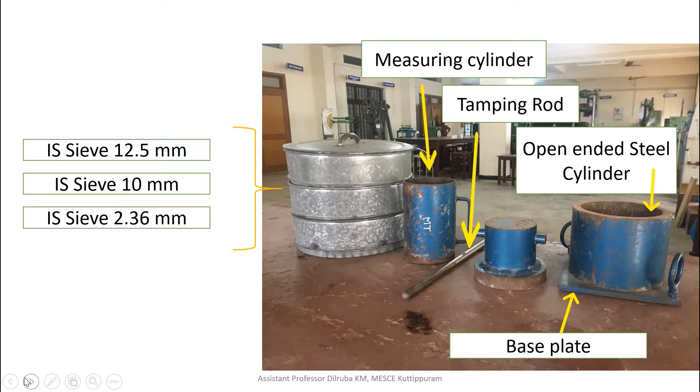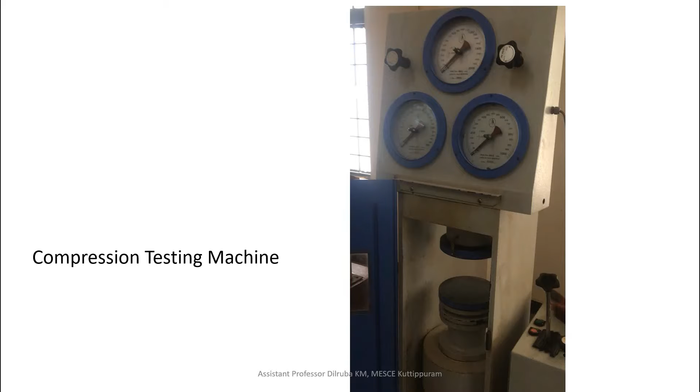First, let us see what are the apparatus required for this test. The first apparatus is IS sieve. We must need 12.5 mm, 10 mm and 2.36 mm IS sieves, a measuring cylinder, a tamping rod, and an open-ended steel cylinder with a base plate. Then we may require a weighing balance for taking the weight of the aggregates, and a compression testing machine in order to crush the aggregate.

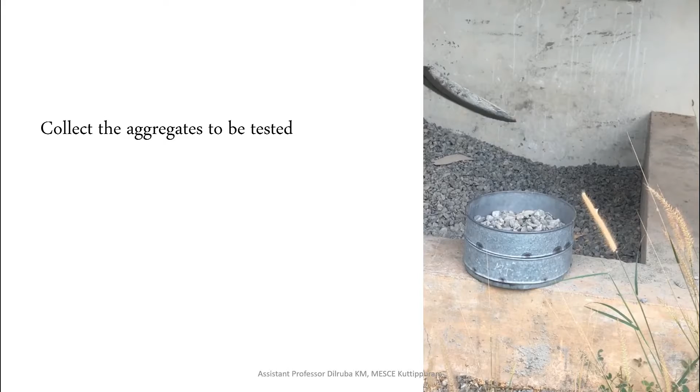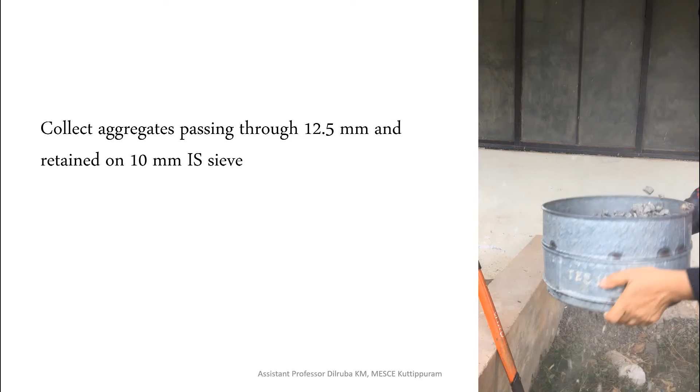First step is to collect the aggregate to be tested. We will collect some aggregate and sieve these aggregates through 12.5 mm, and we have to collect the aggregate which is retained in the 10 mm IS sieve. The amount of aggregate collected should be enough to fill the measuring cylinder, which has a diameter of 11.5 centimeters and a height of 18 centimeters.

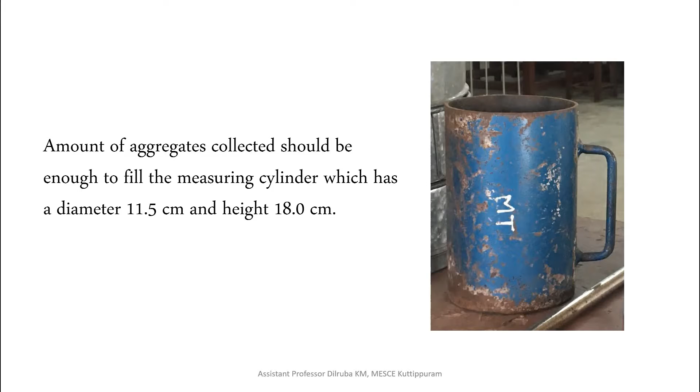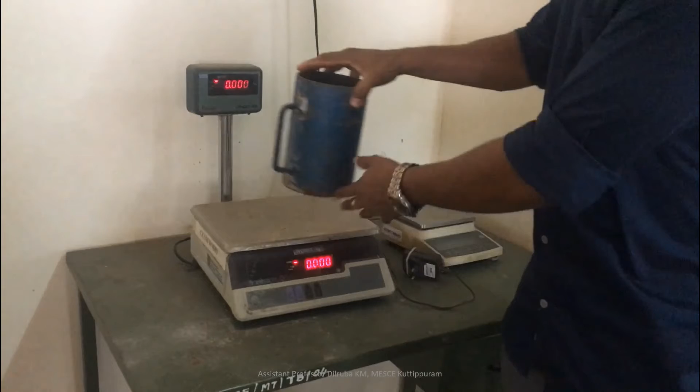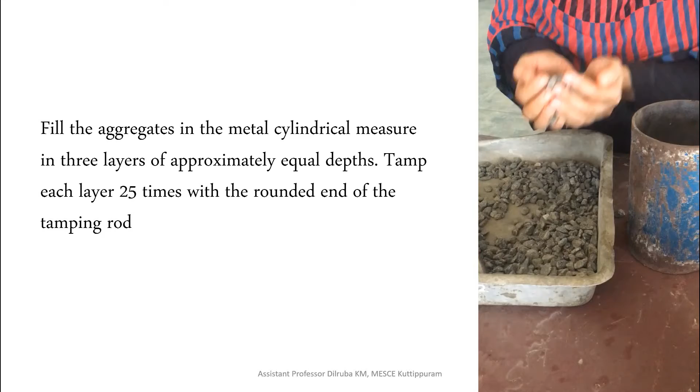Now we will find out the weight of the empty cylinder. For that we will keep the weighing cylindrical measure on the weighing balance and note down the weight. Now fill the aggregate into this metal cylindrical measure in 3 layers. Each layer should be of equal depth, and we have to tamp each layer 25 times with the rounded end of the tamping rod.

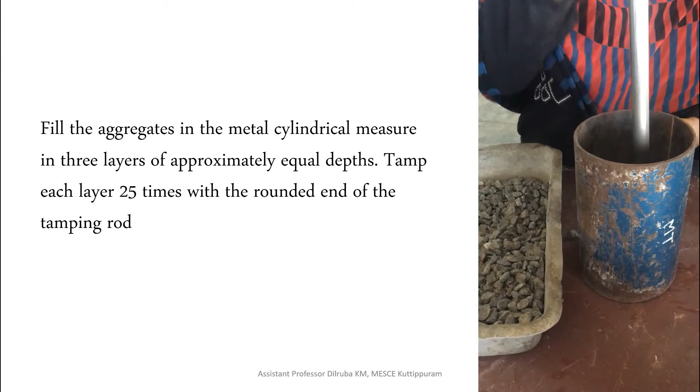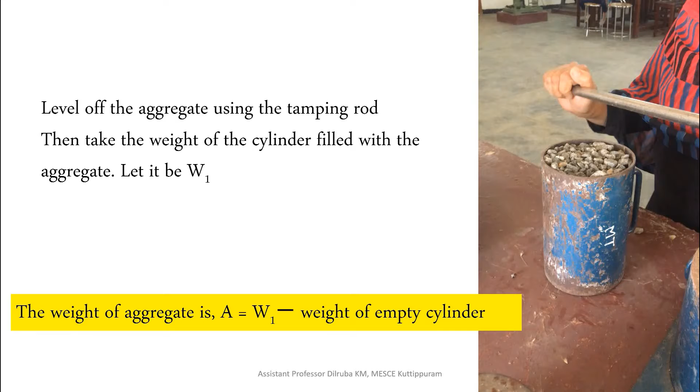This tamping will be continued for all the 3 layers. After the tamping of the 3rd layer, we will level off the aggregate using the tamping rod. Then take the weight of the cylinder filled with the aggregate. Let the weight of the cylinder filled with the aggregate be W1. Then the weight of the aggregate will be W1 minus the weight of the empty cylinder that we have taken before.

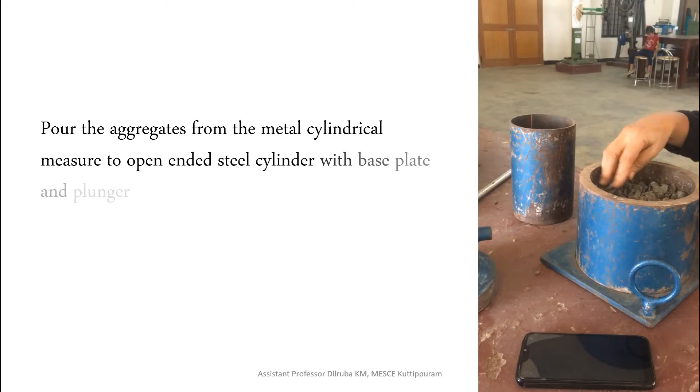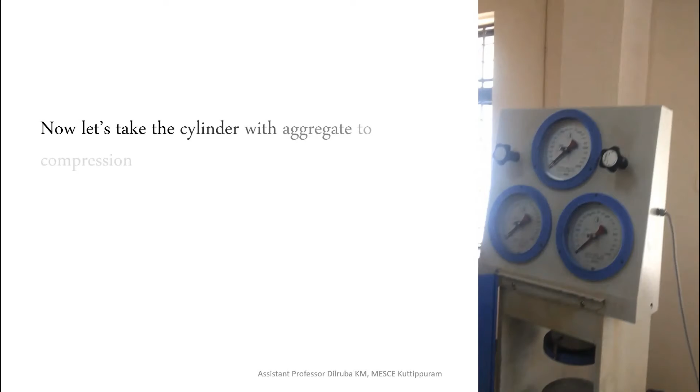Now pour the aggregate from the metal cylinder into the open-ended cylindrical steel cylinder with the base plate and the plunger. Now we will place the surcharge weight over it and take this cylinder into the compression testing machine. We will place the cylinder in the compression testing machine.

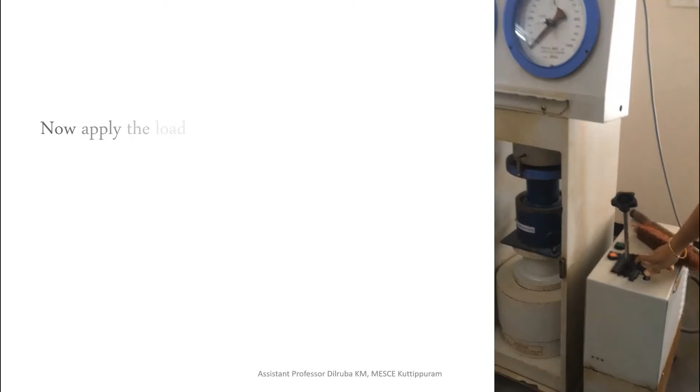In order to provide the load, we switch on and adjust the lever so that you can see a blue color plate which has to touch the surcharge weight so that the load will be applied on the aggregates. You can see the gap between the blue color plate and the load surcharge weight getting reduced. When the blue color plate touches the surcharge weight, the load will be applied.

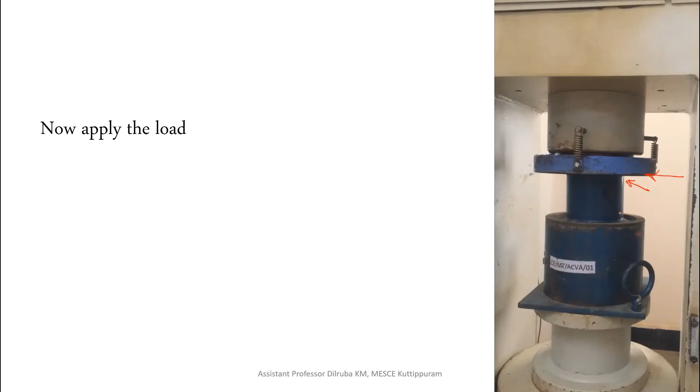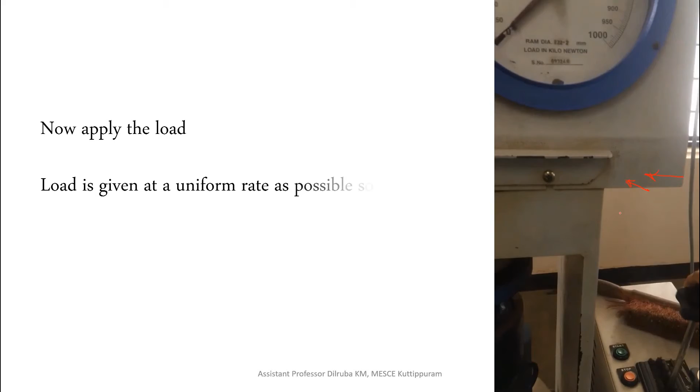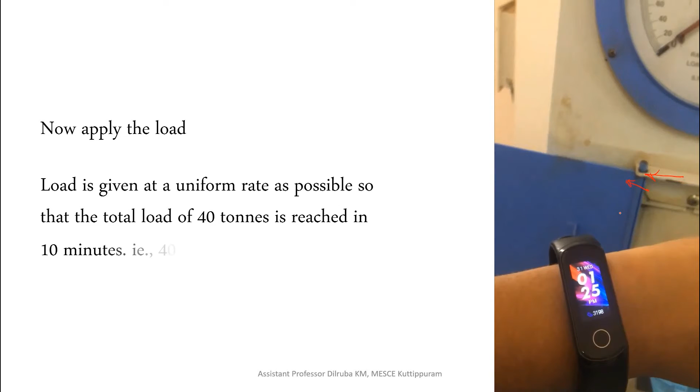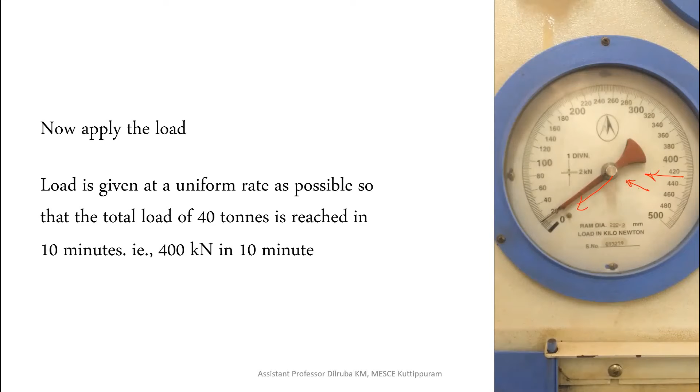We have to adjust the load such that a maximum of 40 kilonewton load should be provided every minute, so that total weight of 400 kilonewton is provided in 10 minutes. We have to adjust the load to be provided at a uniform rate as possible. You can see this reading changing. You have to make sure that at each minute 40 kilonewton will be given, so that you will get 400 kilonewton at the end of the 10th minute.

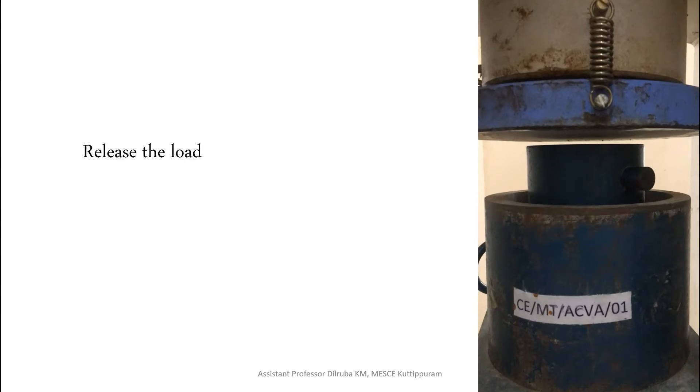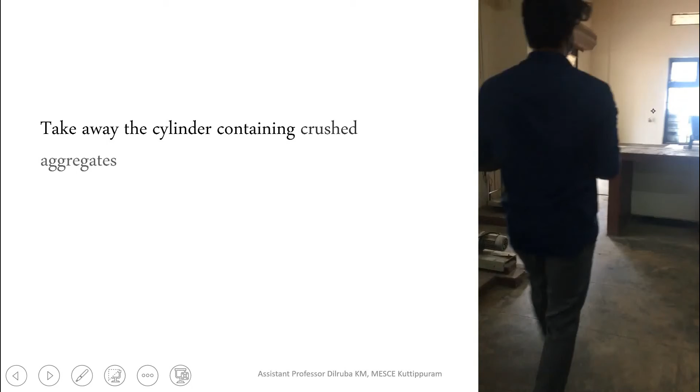After that, we will stop the machine and release the load in order to collect the crushed aggregate. You can see a small gap between the blue color plate and the surcharge weight. Now we will take the crushed aggregate and remove it from the cylinder.

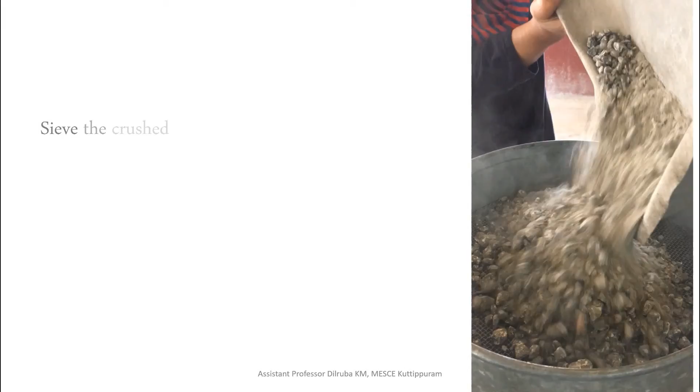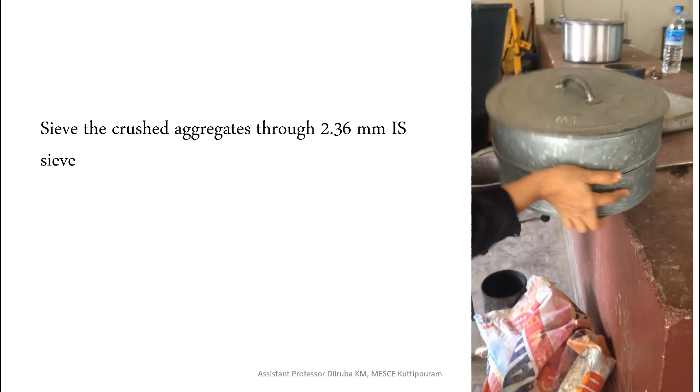Then we will sieve the crushed aggregate through 2.36 mm IS sieve. We have to collect the aggregates which are passing through the 2.36 mm sieve.

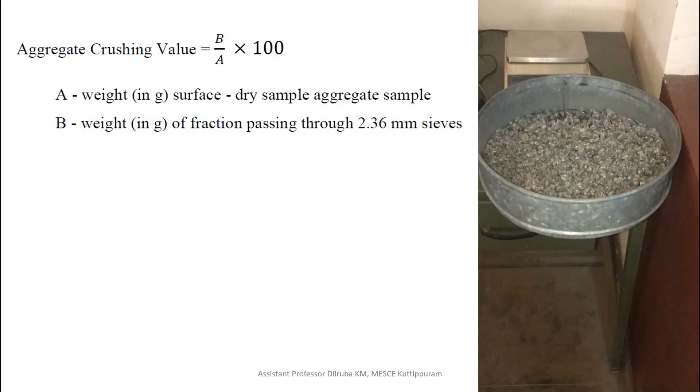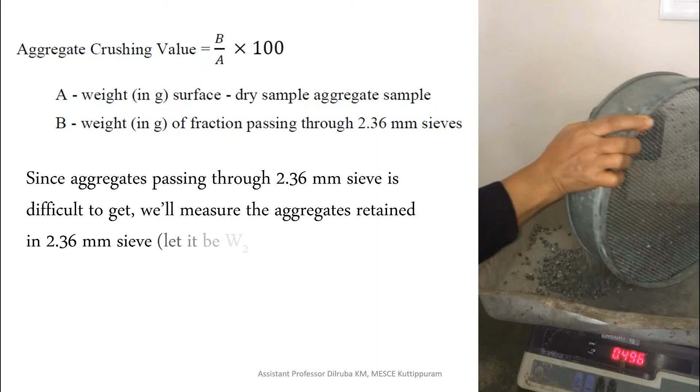So the aggregate crushing value is the ratio of weight of the aggregate passing through the 2.36 mm sieve to the total weight of the aggregate. It is really difficult to find out the weight of the aggregate passing through 2.36 mm sieve because it is very minute and there are dust particles which are difficult to weigh. So what we will do is measure the aggregates retained in the 2.36 mm IS sieve, then subtract that value from the total weight of the aggregate. So weight of the aggregate passing through 2.36 mm IS sieve is equal to A minus W2, where A is the weight of aggregate.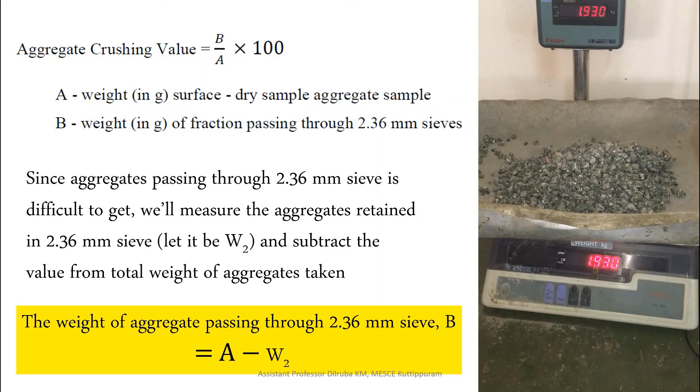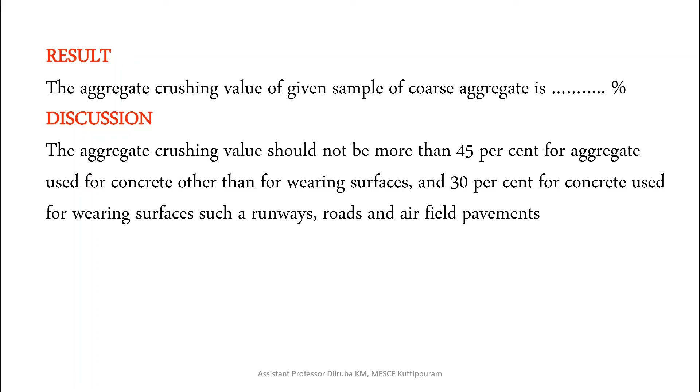So the result, the aggregate crushing value of the given sample of coarse aggregate, will be provided in percentage. The aggregate crushing value should not be more than 45% for aggregate used for concrete other than wearing surface, and 30% for concrete used for wearing surface, which will be provided in runways, roads and airfield pavements.